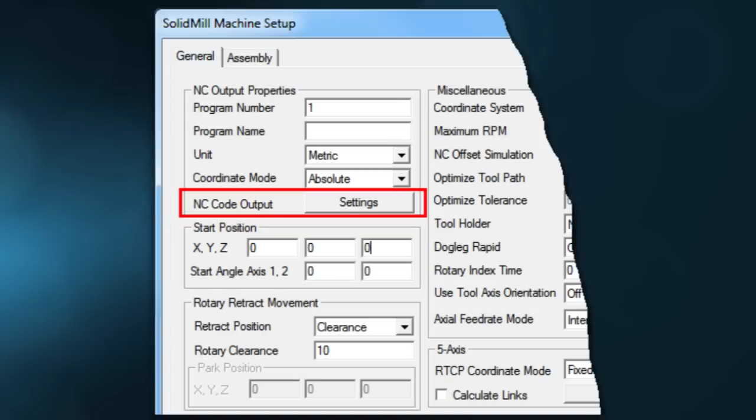Post-processor files are now managed in the machine setup, allowing users to associate one or more post-processors with a specific machine. Esprit updates are now managed directly inside of Esprit. Users can automatically link to the DP Technology website to check if there is an update to Esprit, and if an update is available, download and install it. The new command is conveniently located on the Help menu in Esprit.

When the command Check for Updates is clicked, the updater will connect to the internet to an Esprit product server to see if a new version of Esprit is available.

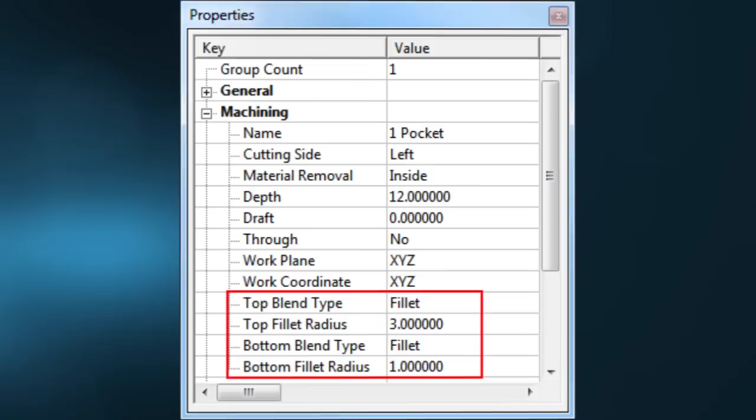Pocketing and trochoidal pocketing have been enhanced to recognize feature properties for top blends, bottom blends, and walls with different tapers. Open Pocket Toolpath now supports wrap pocketing, open islands, and the extra moves parameter.

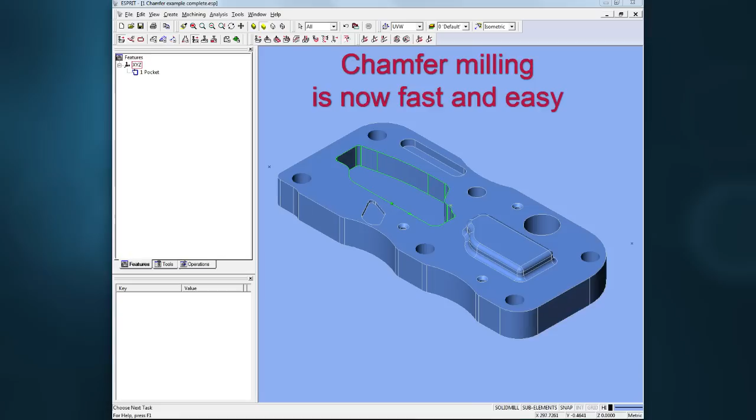Chamfer milling is now fast and easy. Blend properties are now added to the chain and profile features. So when top blend type or bottom blend type is set to chamfer, additional properties can be defined for the chamfer angle and the chamfer depth. When the feature has the chamfer property properly set, the toolpath will automatically adapt to find the touch point between the tool and the chamfer profile.

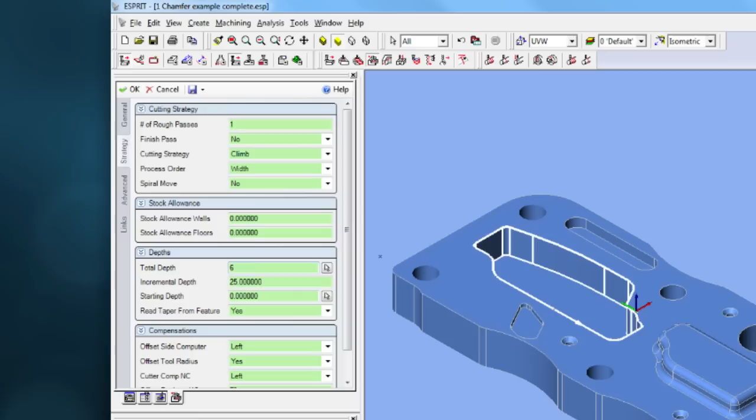Creating a chamfer operation is fast and easy. First, select the feature with the chamfer properties already defined. Second, select the tool - you can choose any tool that is able to cut or rough a chamfer. Third, the total depth defines the position of the bottom of the tool on the finish pass.

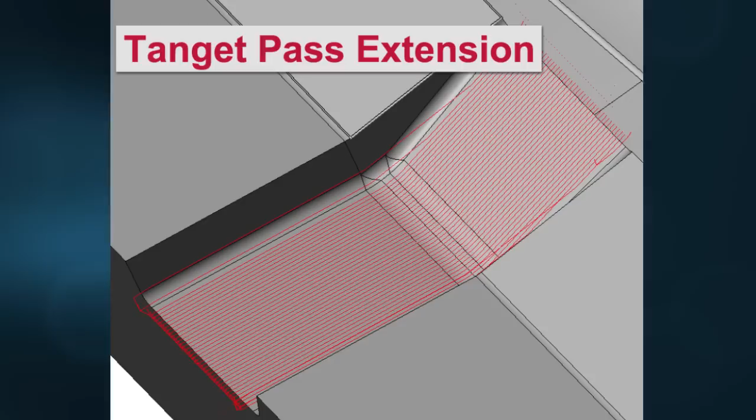Numerous enhancements have been made to all 3-axis mold cycles. A couple I want to point out: a new toolpath option, tangent pass extension, which will apply a tangent extension at the two extremities of an open pass. This new option has been added to parallel planes finishing, Z-level finishing, between curve finishing, and 5-axis composite milling.

For all SolidMill mold cycles, 3-axis and 5-axis, retract optimization has been updated with a new option called Within Operation that optimizes retract inside the operation. The tool starts and ends at the full clearance height.

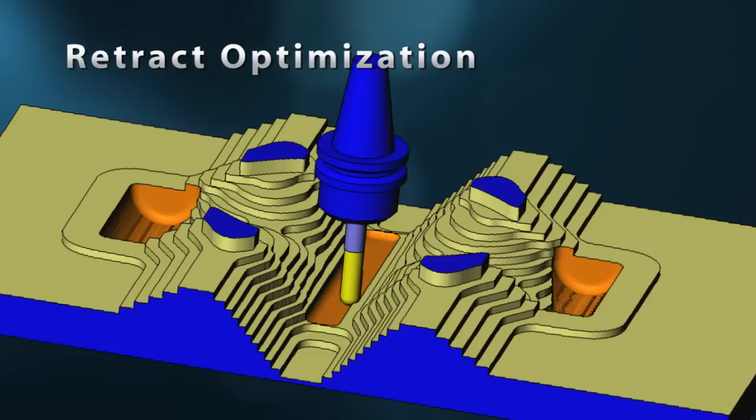Enhancements have been made as well to all 5-axis mold cycles. There are many, and the one I want to focus on is the composite cycle, which now has a new option for controlling the orientation of the tool axis. This new orientation strategy is called Normal to Model.

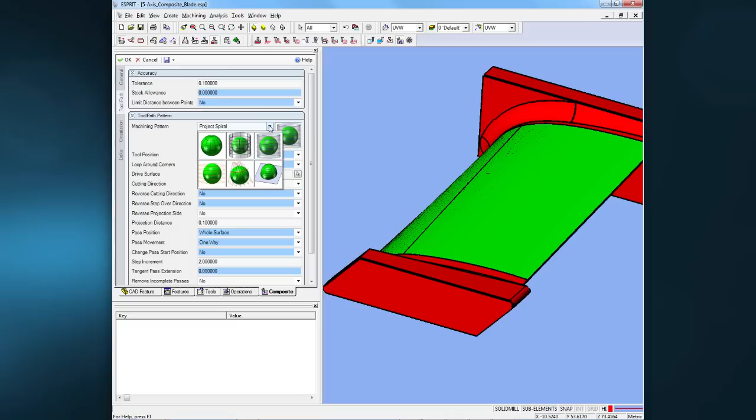The new Normal to Model orientation strategy will keep the tool axis perpendicular to the model surfaces regardless of any selected drive surface. This new strategy is advantageous when a knitted surface is selected as a drive surface for a projected toolpath. Normal to Model is similar to the Perpendicular to Drive Surface strategy, except that the tool axis orientation is always normal to the model surfaces instead of the drive surface.

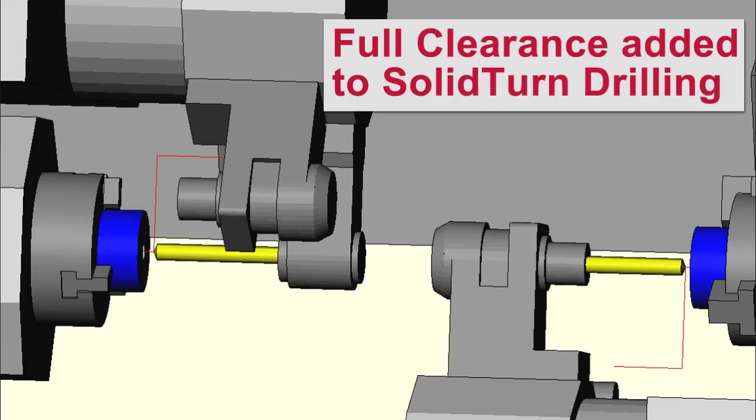Useful enhancements have been added to solid turn cycles. Solid turn drilling has been enhanced with the addition of full clearance as an option for return plane. The advantage of adding the full clearance option to the drilling cycle is that the user can set and view the distance on the technology page.

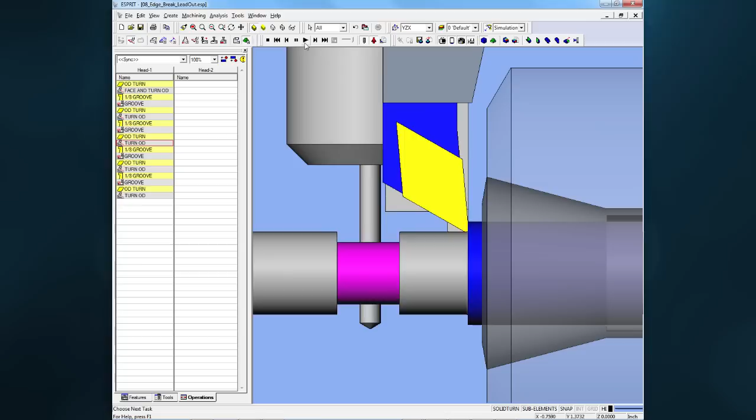New lead-out type option: edge break. To better support Swiss-style turning, a new lead-out option called edge break has been added. Swiss-style lathes utilize a guide bushing to support the bar stock for better rigidity. Occasionally, it is necessary to retract the turned stock back into the guide bushing. If there is a burr on the OD of the stock, the guide bushing could jam or be damaged when the stock retracts.

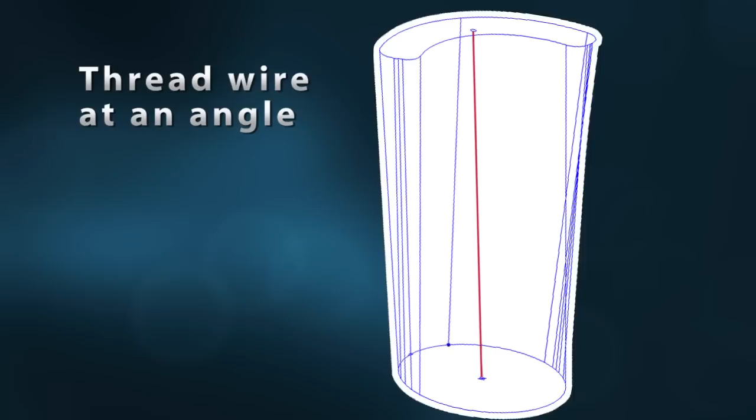Let's take a brief look at wire EDM. In many 4-axis wire EDM situations, users need the ability to thread the wire at an angle to match the tilt of a cavity, or when a wire cannot be threaded vertically. EDM 4-axis features can now be modified to add a tilted thread angle for 4-axis contouring and pocketing operations.

Improved EDM feature recognition allows automatic recognition of dies, holes, and punches from solid models. Just select the solid and part type, and that's it. Esprit does the rest automatically.

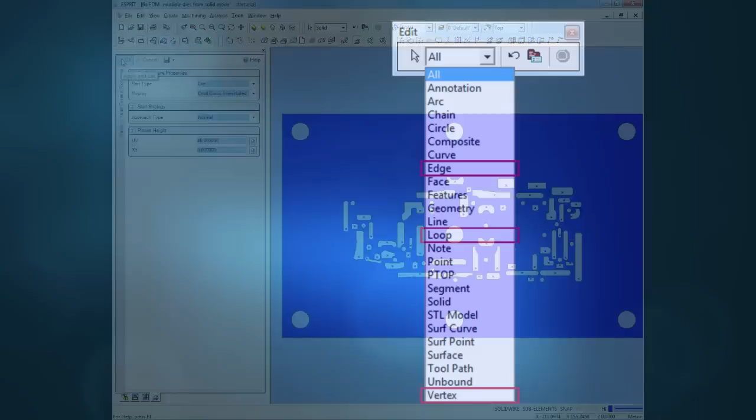Several enhancements have been made to improve the user experience in the Esprit workspace. New selection filter options: now the selection can be filtered for 3 additional types of sub-elements on solid models: edges, loop, or a vertex. A new Normal To command has been added to the standard views toolbar.

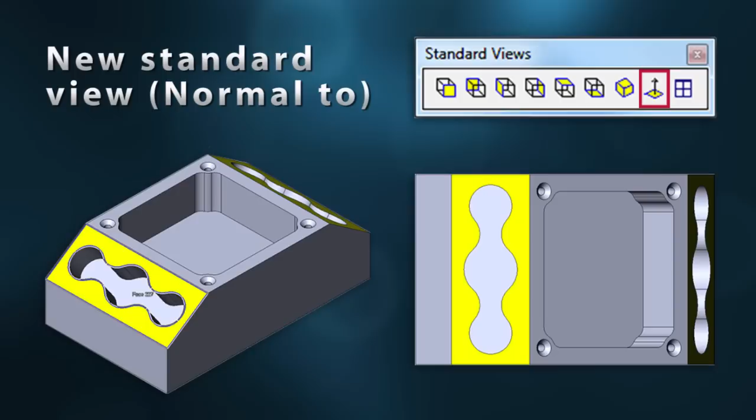When the user selects the Normal To command, Esprit will prompt the user to select a face or a feature. The command will rotate the active view normal to the selected face, or normal to the plane of the selected feature. New analysis tools: users can now launch different graphic displays and configurations from a new analysis menu.

The heat map command displays surfaces rendered in different colors according to the local radius of curvature. Review where and what is the minimum and maximum curvature, which can help you select the most appropriate cutting tools.

The zebra command simulates the reflections of long strips of light on a shiny surface to make it easier to see wrinkles or defects in a surface.

The stripe display also makes it easier to verify that two adjacent faces are in contact, are tangent, or have continuous curvature. If stripes are connected from one face to another, the elements are in contact. If stripes are connected and tangent, there is curvature continuity.

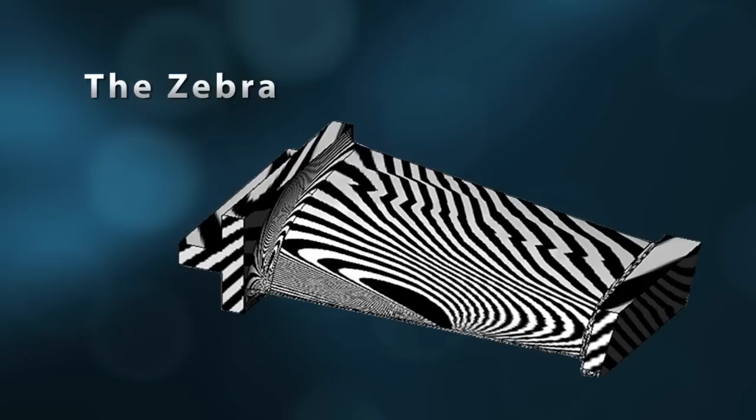When an IGES or STEP file is imported, users have a new option that will convert surfaces contained in the file into a solid model or a sheet solid body. This is an advantage because there are many functions in Esprit where it is easier to use a solid model than a group of surfaces.